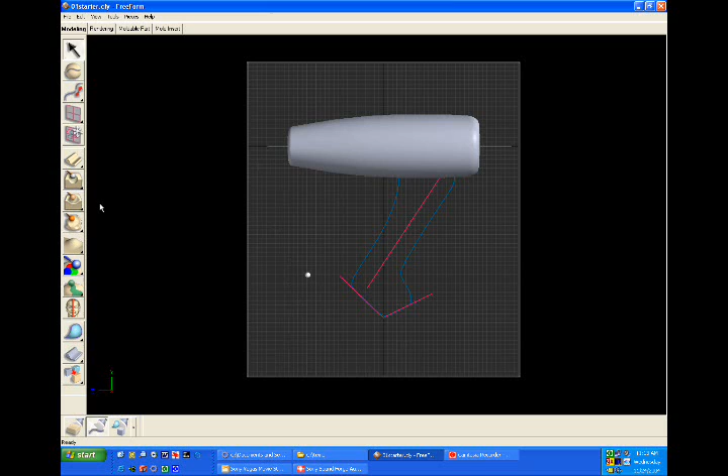Here's an example of building a simple hairdryer using a combination of a solid body imported from a CAD system - that's this top section here - and a handle design done in Adobe Illustrator. Could be done in something else as well, but in this case I did it in Adobe Illustrator and imported it in. I've got some guide curves and dimension lines that are going to help me keep my size straight, but this is where we'd start.

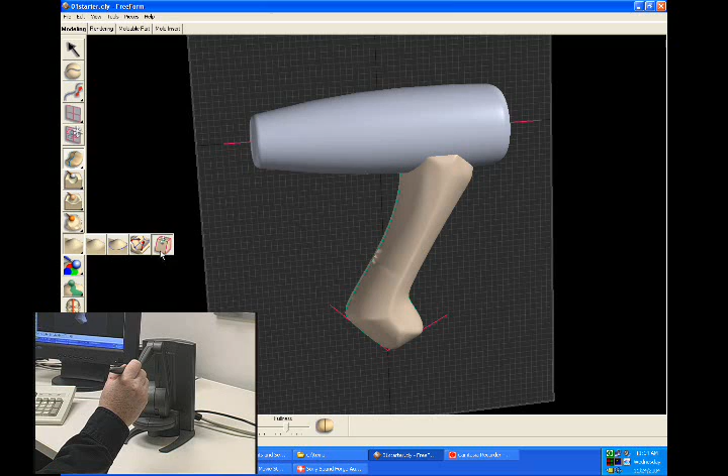The next thing we do is inflate the handle to a certain size, so we'll use the inflate command. Come up and select this curve, grab it with the hand, and inflate. We'd look at that curve from the front using the deform tool and adjust its proportions. Set it on proportional adjustment, come up, grab it, tuck it in, make different changes to the size depending on how we want it affected. Apply that.

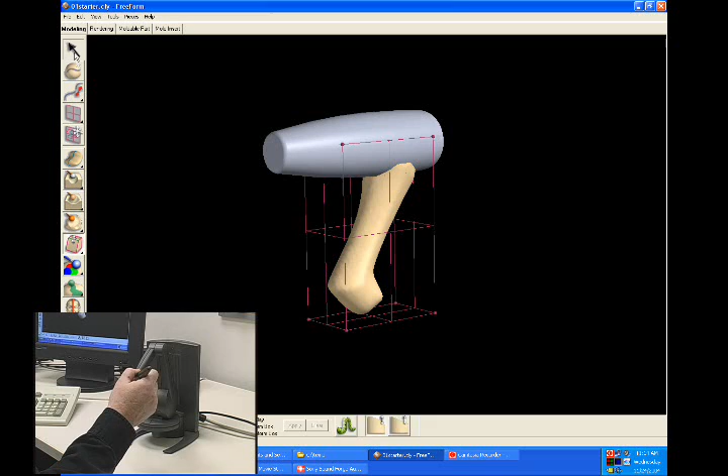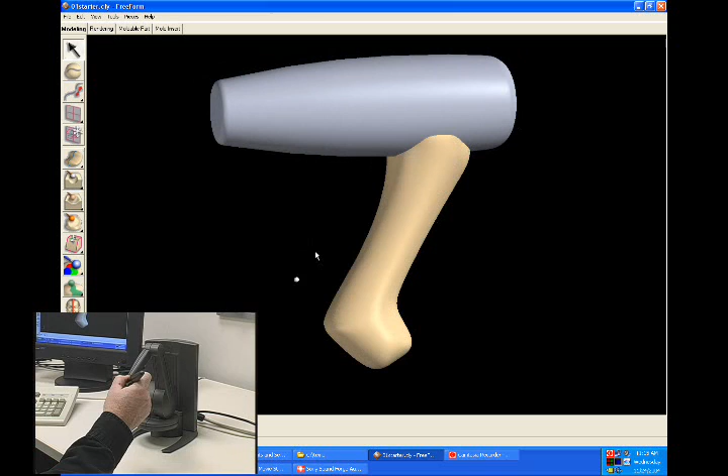Remove the plane, we don't have to see it anymore, and increase the resolution of the actual piece just so it's a bit smoother - I'll turn it up to 2 millimeters in size. Evaluate it, and I'll actually go down to 1 millimeter in size. Each progressive step, instead of going all the way right down to 1 on the first thing, going down progressively in steps actually helps smooth the model out. It does a progressive refinement of the surface and creates a smoother clay model, so we can refine the model and create a smoother surface.

Some of the next things I'll be doing is just adding some simple wire cuts to add some form to the handle. I did a wire cut add here to be able to add clay in the back - so I just created a plane, projected clay down there, and blended it in with that part of the surface.

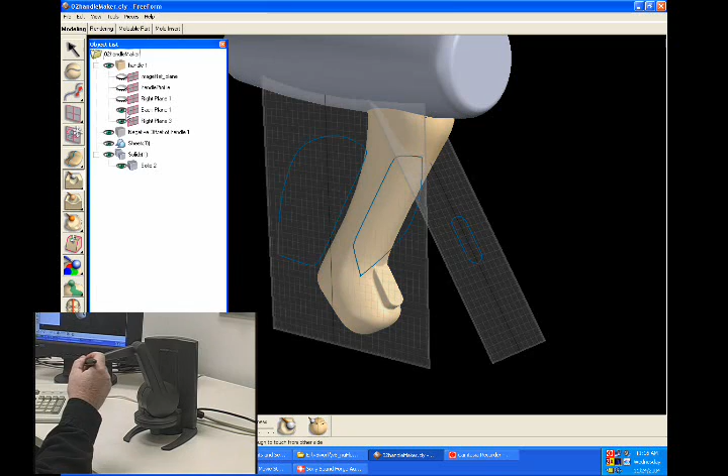Another thing I'd like to do is cut in areas on the clay to add some form to the handle grips. In this case, I took the model and offset this piece here, creating a thinner piece by approximately 1 millimeter - you can see that here. The inside piece is just slightly thinner.

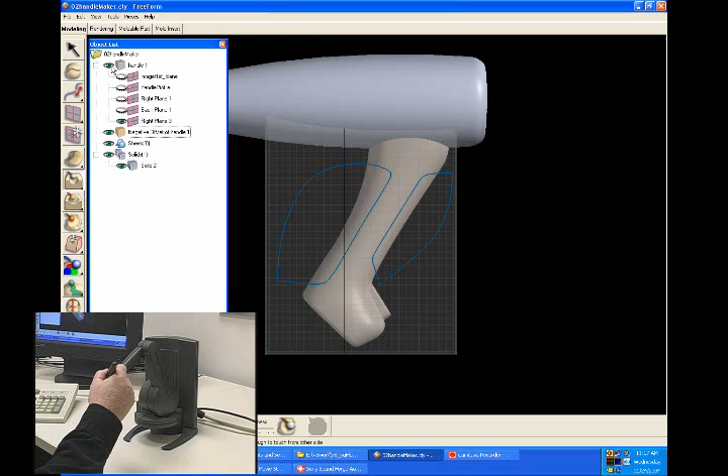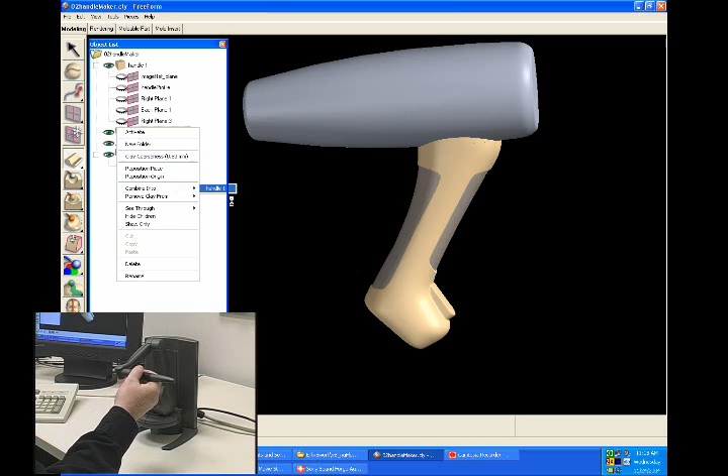What I'm going to do is just cut away that outside using a wire cut to reveal the inside, so I'll have a slight little bevel in here. Let's wire cut this, cut away the material, and once removed, I'll have a nice little step in on the front and the back. Then I'll just merge those two pieces together - merge the outside with the inside, do a combine. You can see those are two separate pieces.

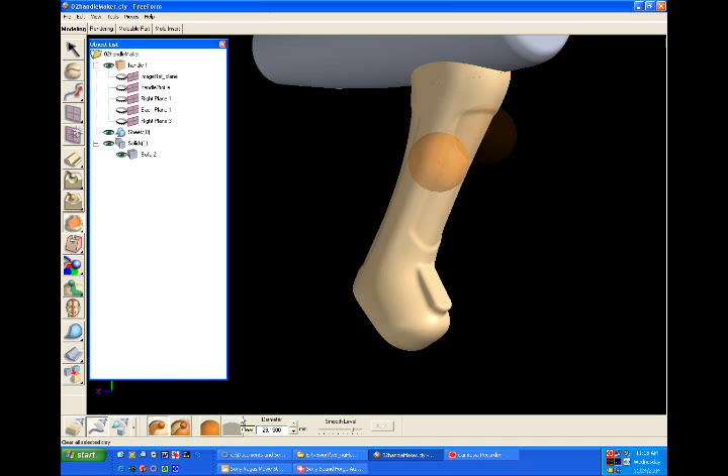Then I did several smooths. I don't want this to be a hard edge handle - I want it to be nice, soft and organic. So I used the smooth command, or area smooth command, selected the entire thing and smoothed it quite a bit. I rounded it off so there were no hard edges, then smoothed it a little bit more. So now I've got a nice, soft, organic handle with a hint of the actual cutaways in it, which makes it a little bit more detailed. Also, in those areas that are kind of like slight insets, there's going to be a gripped handle.

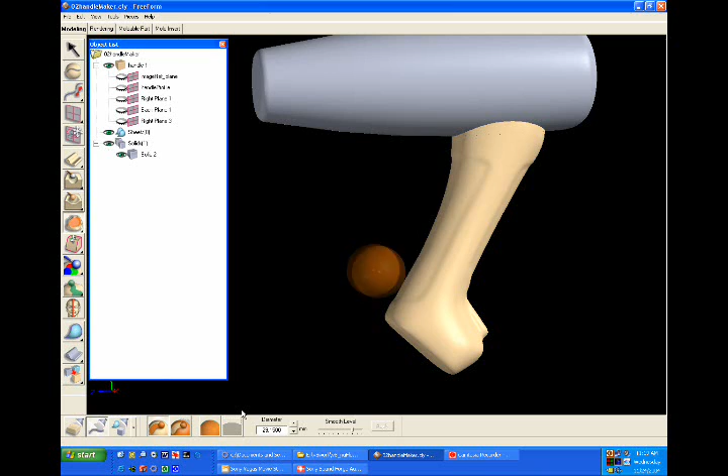Now, you notice I'm working on this without having it connected to the actual body yet. When I do the body connection, I'll explain it when I get there, but I want to make sure I don't do anything that changes the form as it goes from clay to this solid. I need that to be an accurate register, or I will get a discontinuity there.

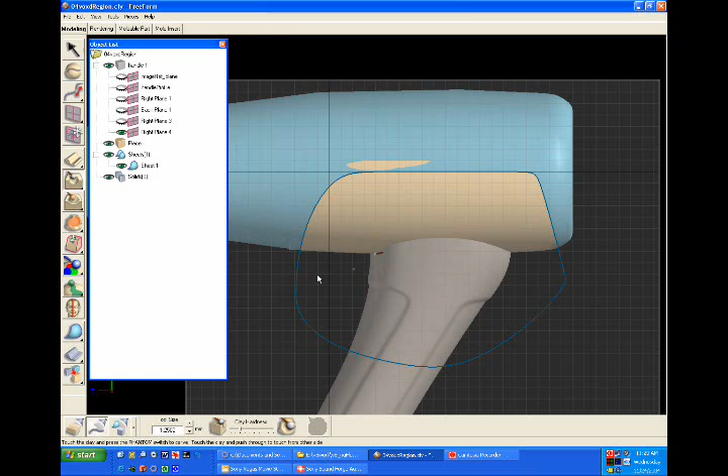In this next step, I've just completed a voxelized region. I created a curve on a plane, used voxelize with profile, gave it a certain thickness, and converted the area where that profile intersected that sheet, creating a voxelized region, an area converted to clay. You can see my handle intersects that part, and that's where I'm going to join the two together to build a blended handle form.

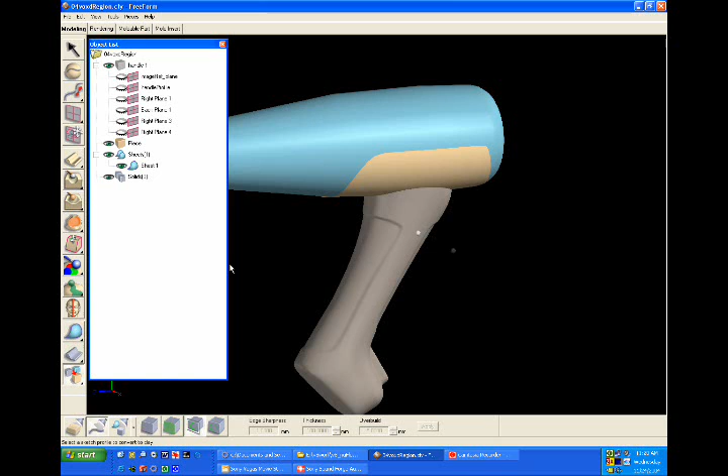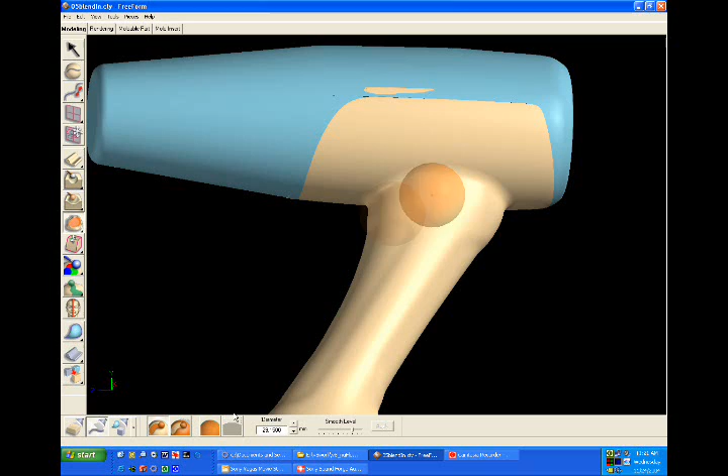Here I've used the area smooth command, painting an area between these where the two parts would join together using the combine tool. I did an area smooth on that area and blended the two together to create that connection. I want this transition to be as smooth as possible. I could have used the shape tool to do a number of different things, but I wanted it pretty simple where it joined between the two. Using voxels and clay, you can just jam it together, blend it, round it, smooth it, whatever you want.

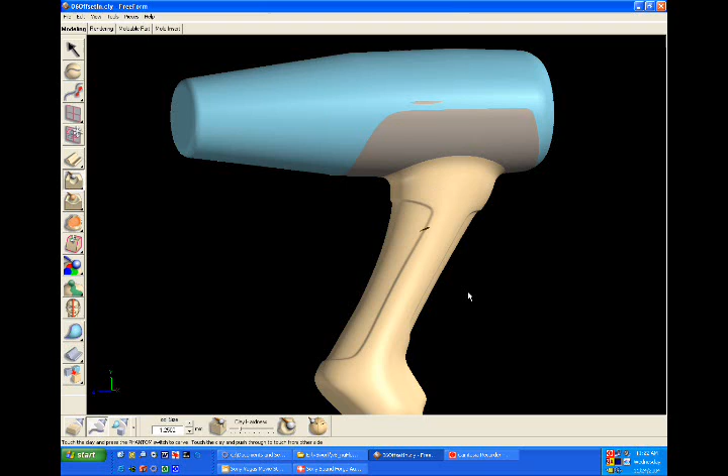Now, to step back a minute to show you how I did that blend: what I want to be able to do is as smooth a blend between the two as possible. I want to be able to do lots of smoothing and changes on this piece while not changing the piece where the two geometries meet, the sheet body and the clay area that was converted from it.

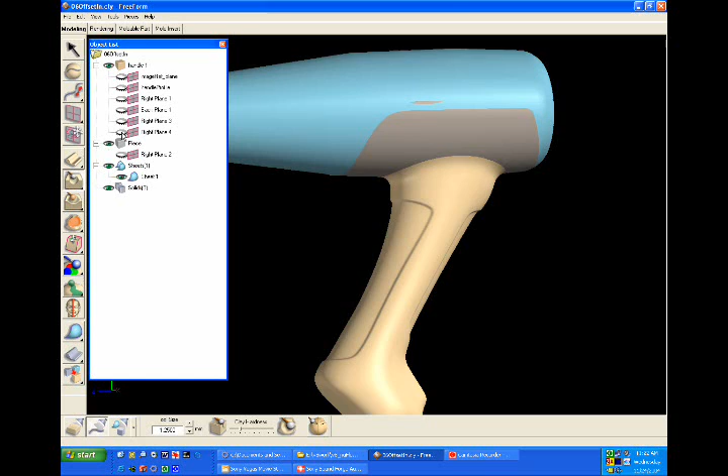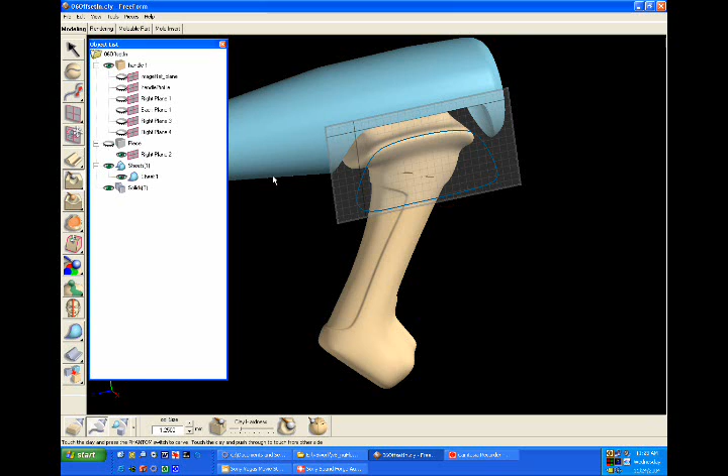So you can see in this example I've actually got two pieces. I selected an area from this piece, grabbed it and copied it so that I had a chunk of material up here that I could work with. In this way, I had a piece that I could smooth, blend, do all kinds of changes to without affecting where the two other geometries met.

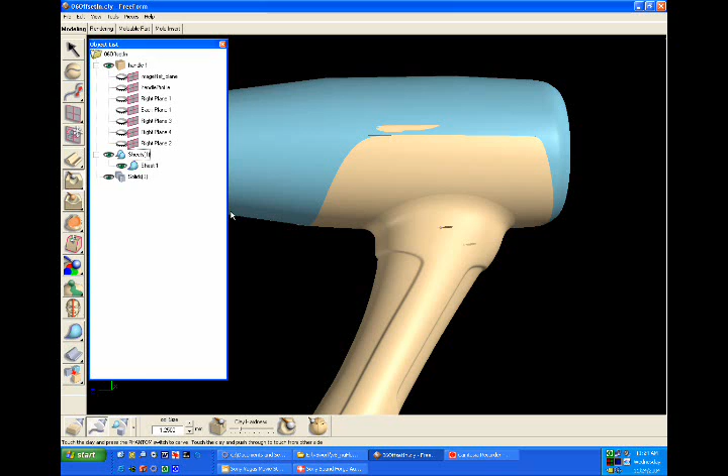You'll see what I do is I now go and combine this piece where I've been able to do the blend and the smoothing and everything like that too. I can combine those two pieces together and get a much smoother piece. So I'll do combine into handle 1, and I've been able to arrive at this really nice transition from this piece here into my piece that I don't want any changes on at all.

Again, I don't want to have anything happen where this piece contacts my sheet body. Those pieces must stay in as exact a register as possible to prevent gaps and discontinuities when I go and create patches that reverse engineer from this edge onto the clay.

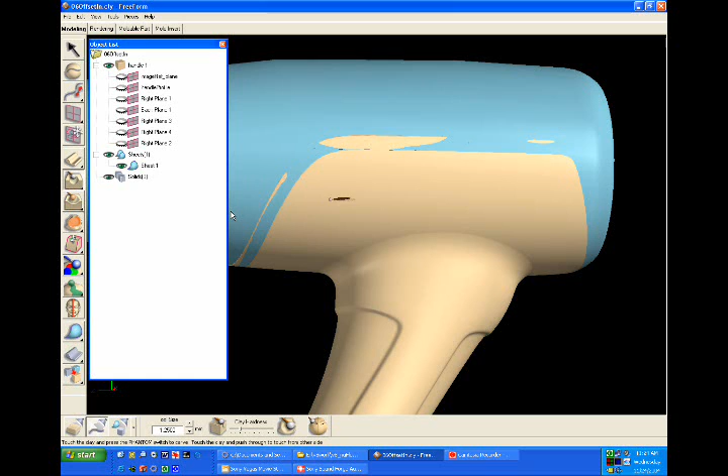Now, again, pay no attention to this clay up here. This clay is just from the overbuild. When this area is voxelized, it builds out a certain number of millimeters you specify, and that clay won't affect the work I do later because it's outside of the edge that I'm going to copy from, the edge being this edge here. So it's not going to affect where I work from. You can see it's clearly on the other side of it, but just to point it out.